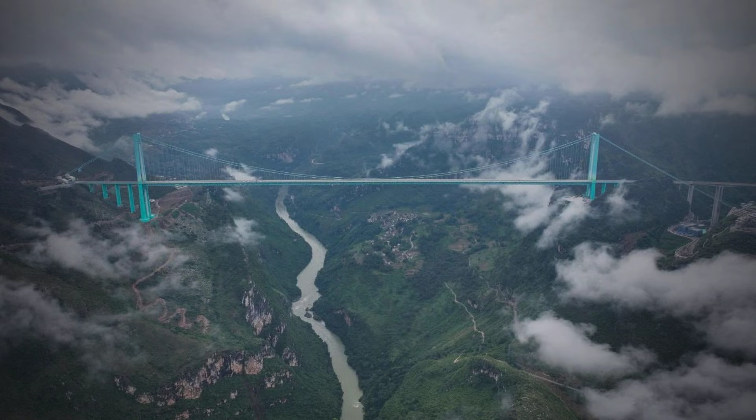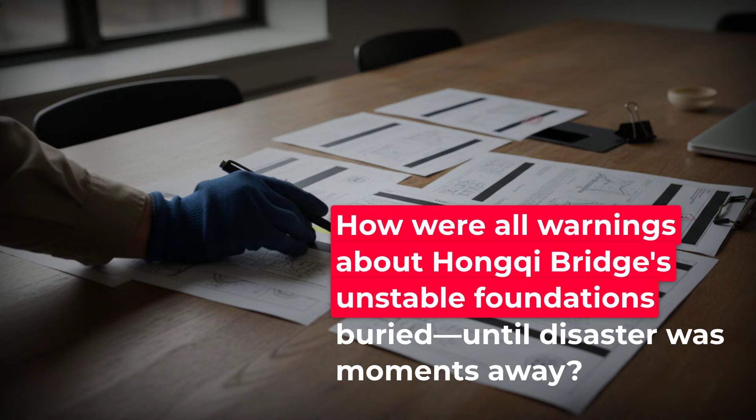On April 13, 2025, a towering $500 million bridge opened, linking Sichuan to the Tibetan Plateau. Less than 7 months later, it was closed, as engineers raced to evacuate after discovering a 10-centimeter crack, just hours before 10,000 cubic meters of earth hurled a 758-meter span into the ravine below. No lives were lost, but the unanswered question remains: how did every warning about Hongqi Bridge's unstable foundations get buried until it was too late?

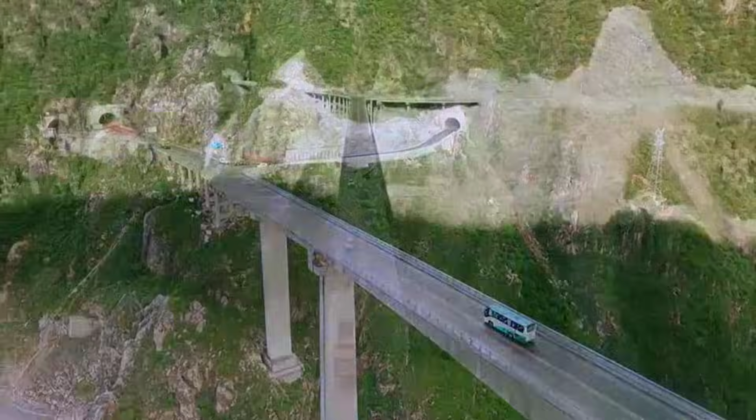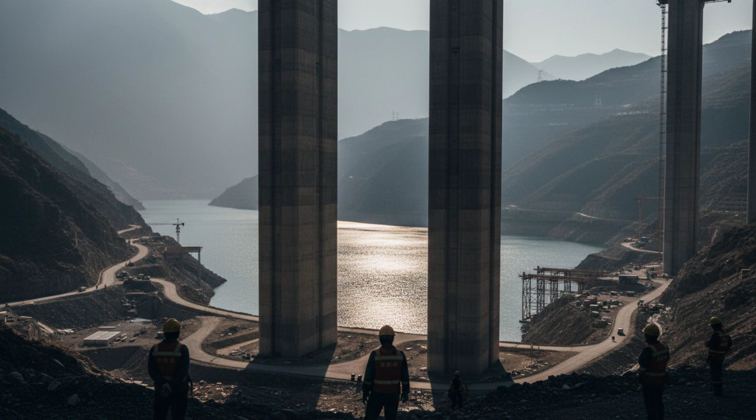April 13, 2025. After 5 years of relentless construction, the Hongqi Bridge opened to traffic, a 758-meter link stretching across the Zumuzu River Canyon. Its soaring concrete piers, each as tall as a 56-story tower, stood as proof of engineering ambition on the edge of the Tibetan Plateau.

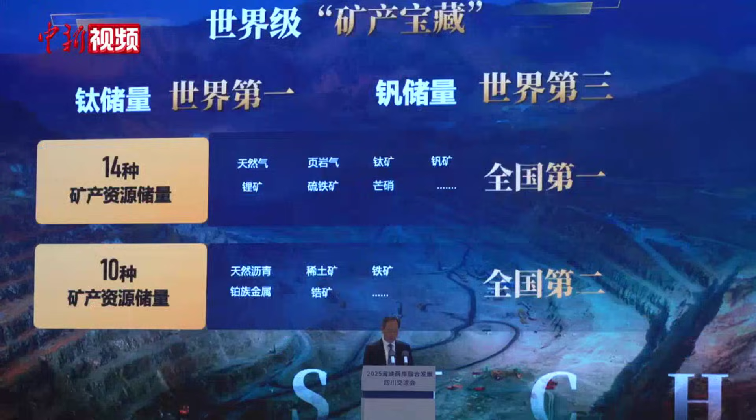The project's price tag of $500 million made headlines, but the real stakes were political, as provincial leaders promised a direct route from Sichuan's industrial heartland to some of China's most remote regions. Ribbon-cutting ceremonies drew crowds and cameras, the bridge hailed as a flagship for the Belt and Road Initiative.

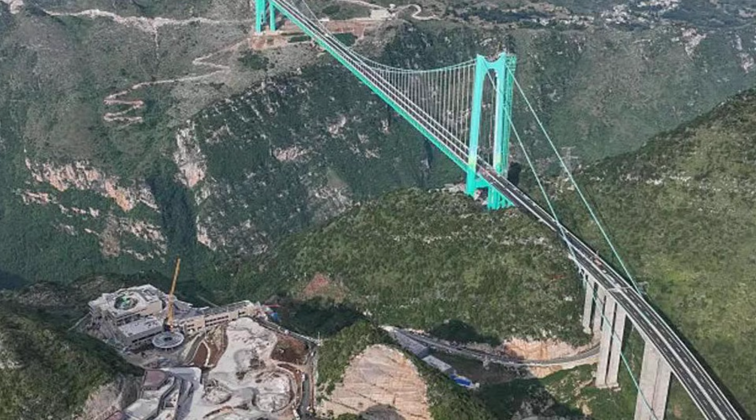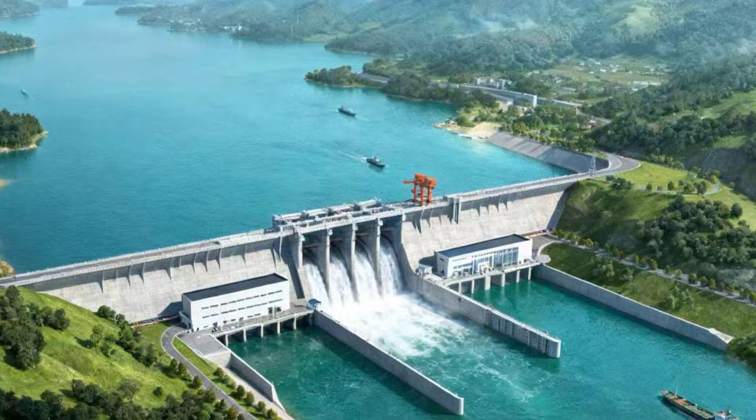Barely 6 weeks later, the landscape changed again. On May 1, 2025, the Shuangjiangkou Dam, just upstream, began filling its massive reservoir. This was no ordinary dam. At 312 meters, it was the tallest rockfill dam in the world, designed to generate 2,000 megawatts of power.

The new lake crept higher each day, pressing millions of tons of water into the fractured limestone slopes that had always made this region unpredictable. The bridge and dam now stood side by side, 2 mega projects sharing the same unstable ground.

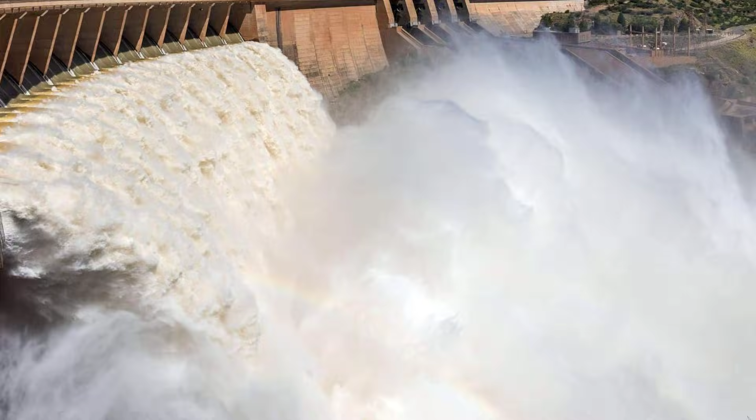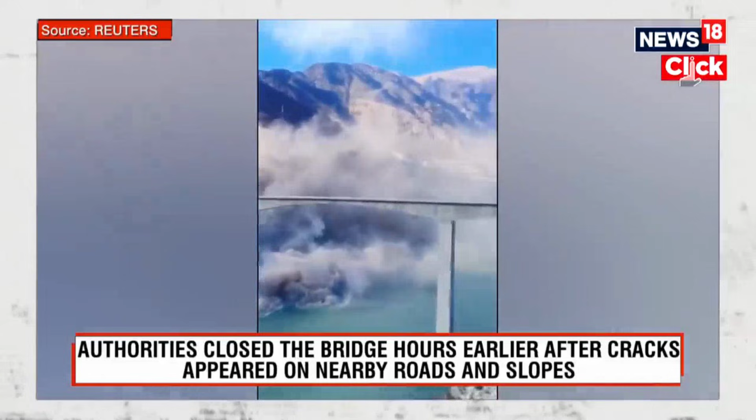As summer faded, the clock kept ticking. By early November, the dam's reservoir neared its highest planned level. On November 9, 2025, a grand ceremony marked the dam's official inauguration, with government officials, engineers, and media gathered to celebrate the achievement. The bridge, just 2 days shy of disaster, still carried the weight of daily traffic and the hopes of a region. No one paused to consider how quickly the milestones had stacked up.

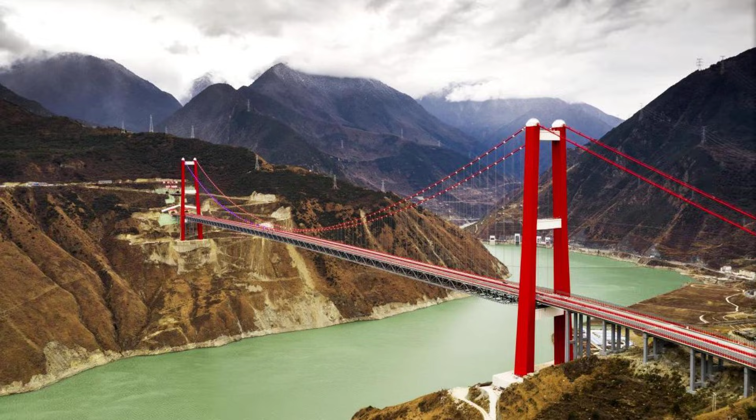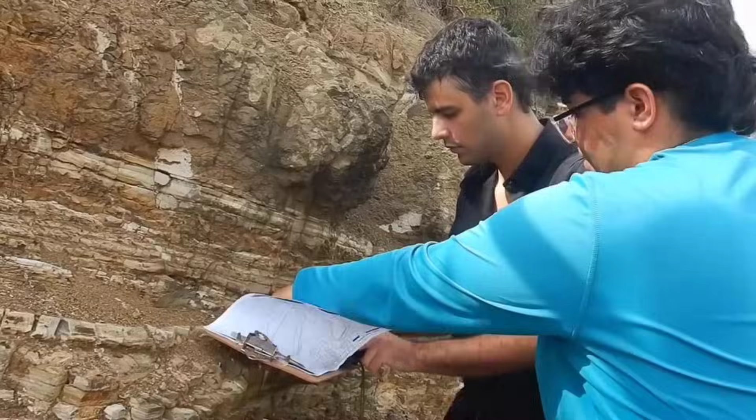5 years to build, 6 weeks from bridge opening to dam fill, and only 7 months of operation before the next crisis. The timeline was relentless, each event compressing the margin for error. In the shadow of the world's tallest dam, the Hongqi Bridge's fate was now tied to forces that did not care about schedules or celebrations. Every milestone checked off the list brought the next risk closer, even as the official ceremonies proclaimed success.

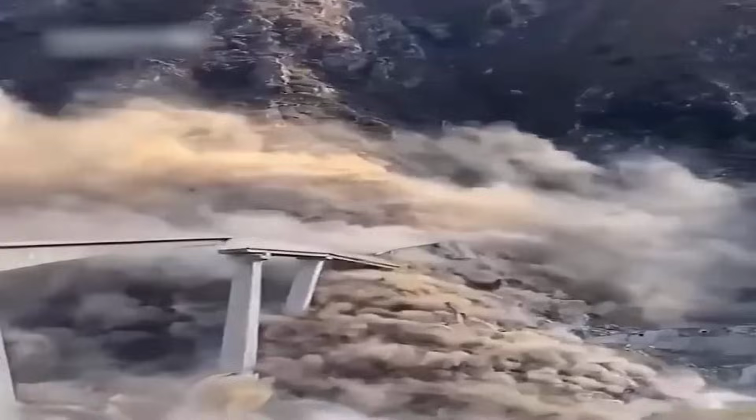On November 10, 2025, at precisely 3 p.m., a routine inspection on the Hongqi Bridge turned urgent. An official traced a jagged crack running 10 centimeters wide across the concrete deck, wider than a man's thumb. The ground nearby showed fresh fissures, and the mountainside itself looked unsettled.

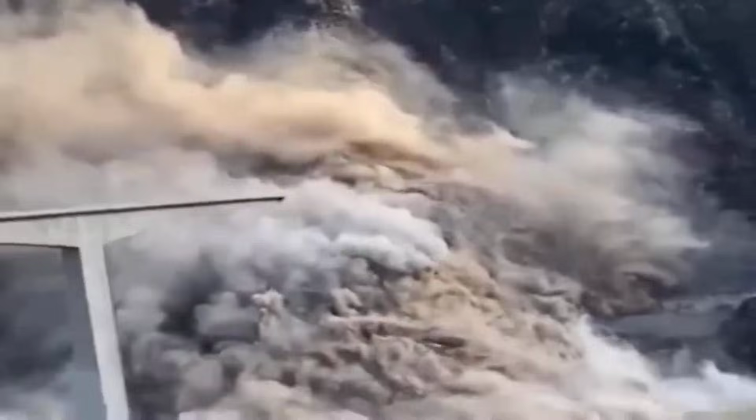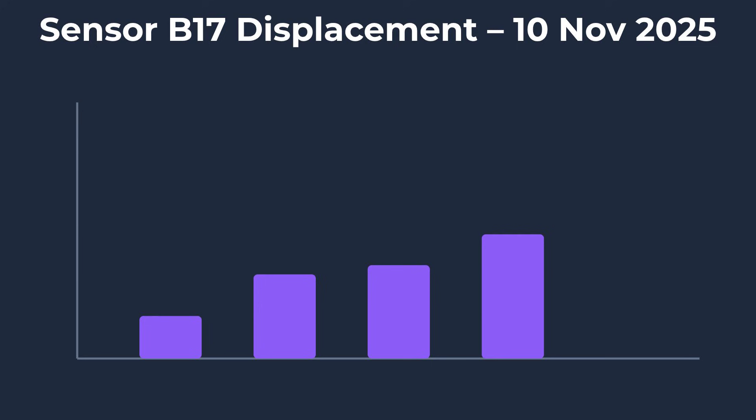Traffic rumbled over the bridge as usual, but the supervisor on duty refused to ignore what the sensors were showing. Displacement readings had started climbing. Too fast, too soon. He radioed for an immediate halt to all vehicles and ordered the bridge closed, even as some questioned whether the crack was just a surface defect.

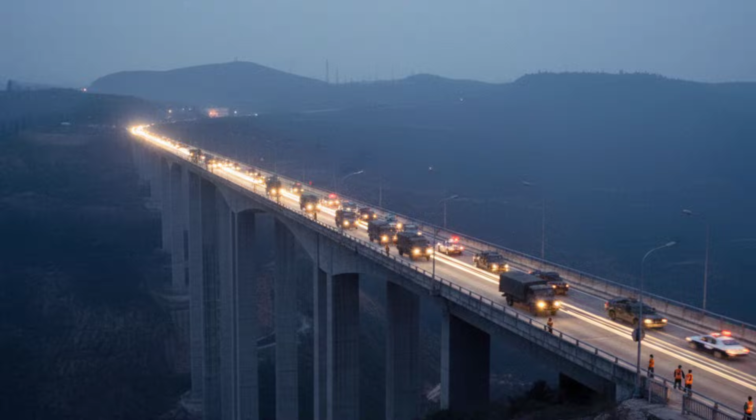Evacuation protocols snapped into place. By late afternoon, warning lights flashed at either end of the span. Drivers were turned away, and stranded vehicles were guided off the bridge in small convoys. The decision to clear the structure was not made lightly.

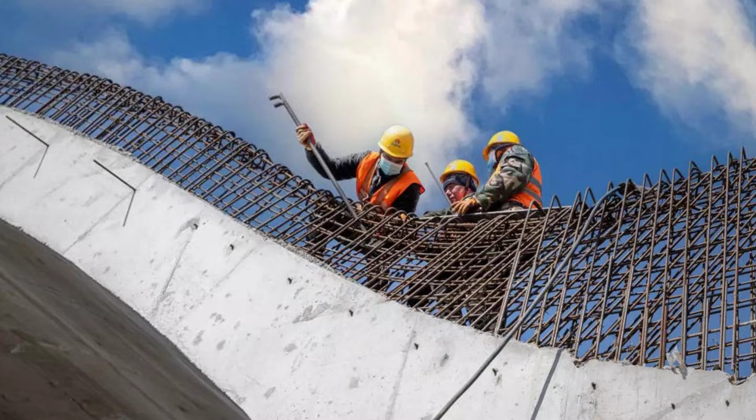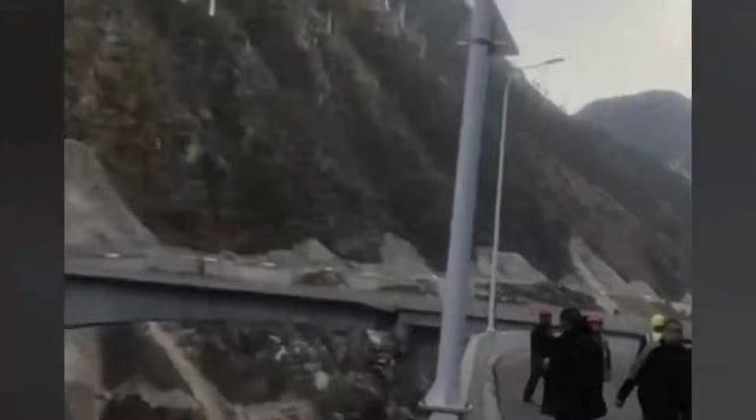Every hour the road stayed closed meant mounting pressure from above. But the supervisor stood firm. He walked the length of the deck with his crew, checking every expansion joint, feeling the vibration underfoot. Workers reported the bridge trembling beneath them, a low, unnatural sway that grew stronger as dusk fell.

By 11 p.m., the last car had left. The bridge, now empty, stretched silent over the canyon. On-site workers gathered their equipment, some glancing nervously at the crack, others filming short clips on their phones. One foreman, voice shaking, recorded a message for his family, just in case.

The supervisor checked the sensor logs one final time before locking the site gates. He knew what the numbers meant. The ground was shifting, and the bridge was no longer safe.

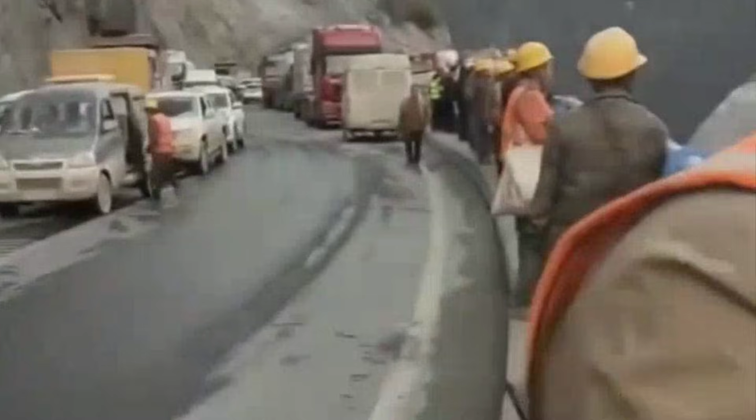No one slept well that night. Some workers stayed in nearby dormitories, replaying the day's warnings in their minds. Others left the valley altogether, unwilling to risk what might come next.

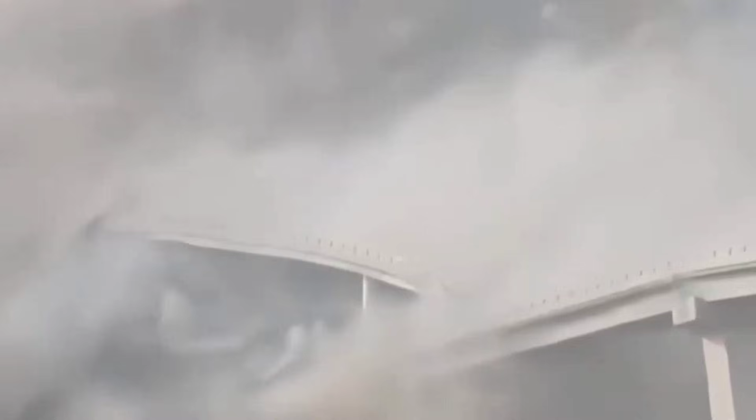The bridge remained deserted through the early hours of November 11, 2025. When morning came, only the wind moved across the empty span. The evacuation, prompted by a single undeniable crack, would be the reason not a single life was lost when disaster struck. Beneath the Hongqi Bridge, the ground was anything but solid.

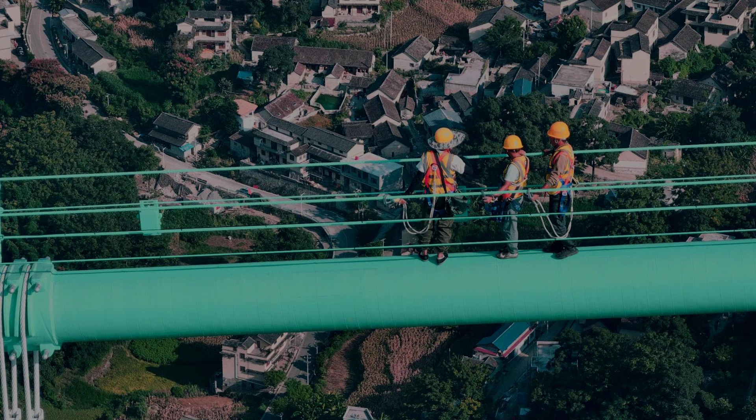Construction records show each foundation pile driven just 20 meters into what was believed to be stable limestone bedrock. On paper, that depth met the minimum code. In reality, it barely scratched the surface of a landscape riddled with hidden threats.

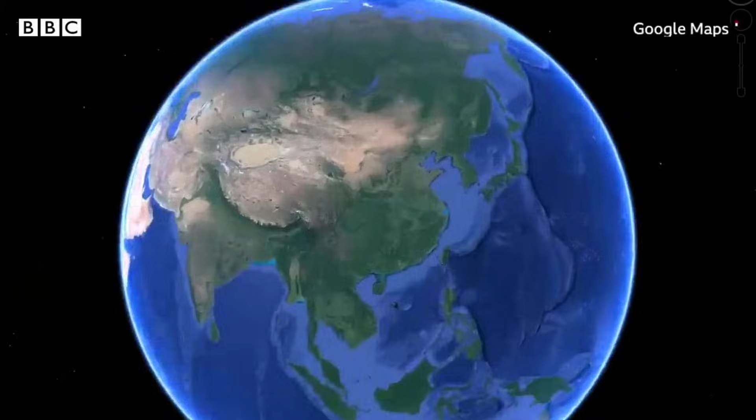Karst limestone, shaped over millennia by water dissolving the rock, forms a tangled web of voids, some as small as a fist, others large enough to swallow a truck. Engineers relied on borehole cross-sections to map these cavities, but the surveys missed nearly 40% of the subsurface voids. What looked like continuous rock on diagrams was, in fact, a fractured maze.

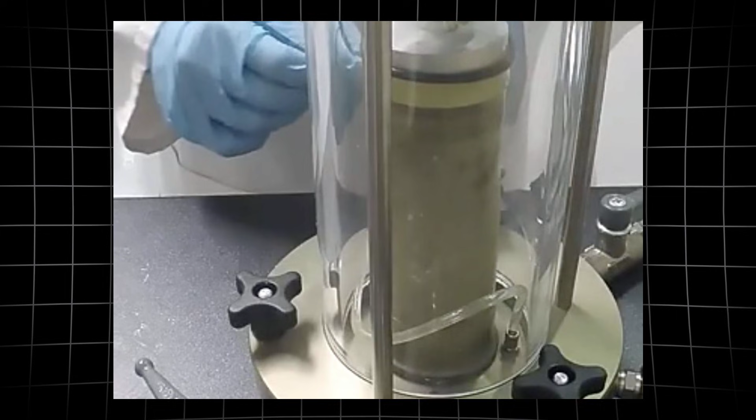From the start, the bridge's support was fragile. Piles meant to anchor the structure rested on pockets of air and loose fill rather than solid stone. Every calculation, load, stress, shear, depended on the assumption that the ground would hold. But the margin for error was razor thin.

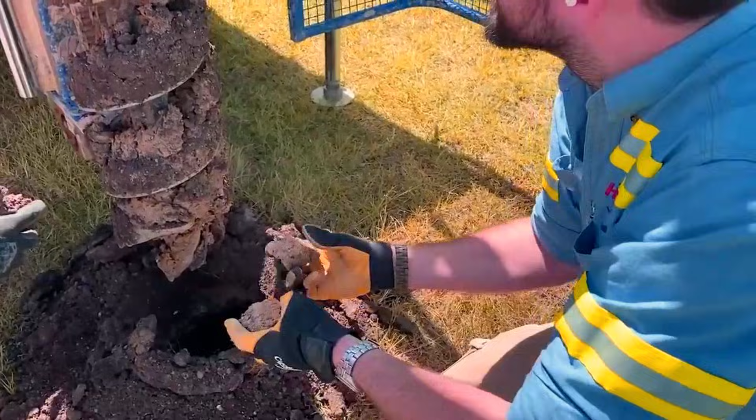In karst terrain, even a small misreading can mean the difference between stability and collapse. The bridge's foundation sockets, at only 20 meters deep, offered little resistance to shifting earth above and empty space below.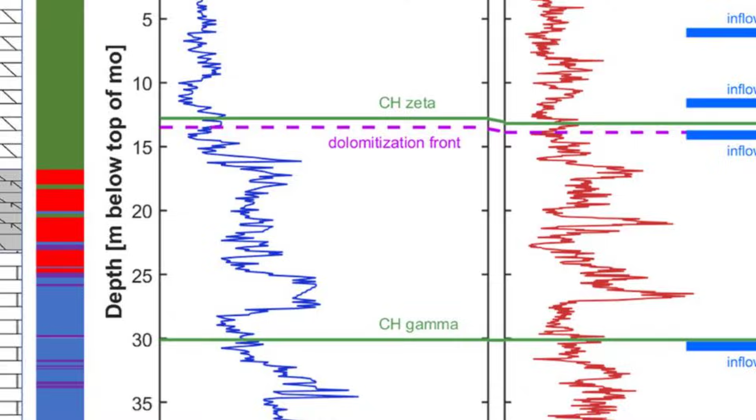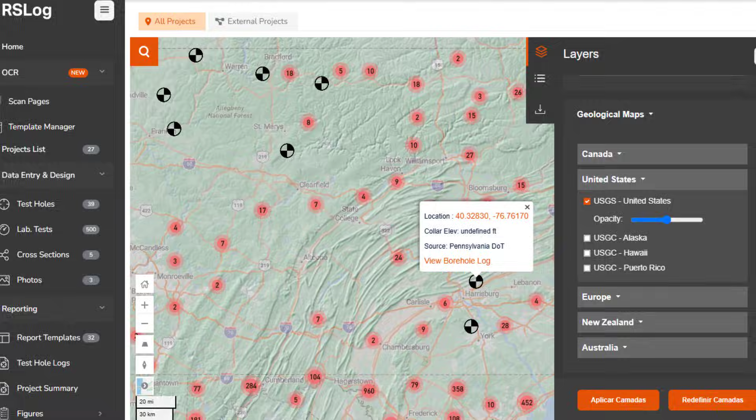Borehole logs from the pre-construction phase tell a story of missed warnings. Core samples showed occasional soft zones and water ingress, but these findings were written off as isolated. Later analysis revealed these were only hints of a much larger, interconnected void system. The true extent of the cavities remained hidden until it was too late.

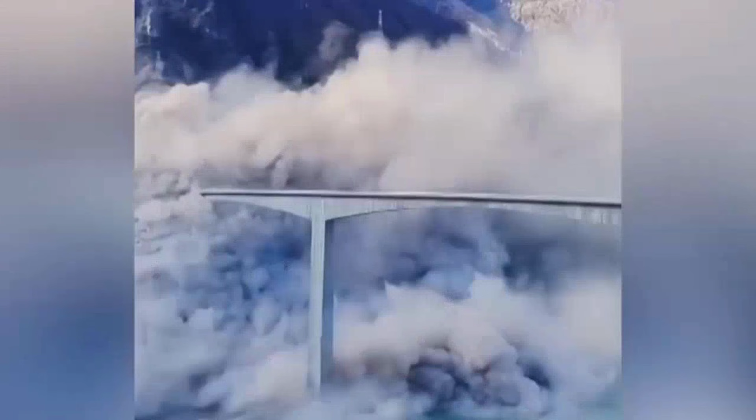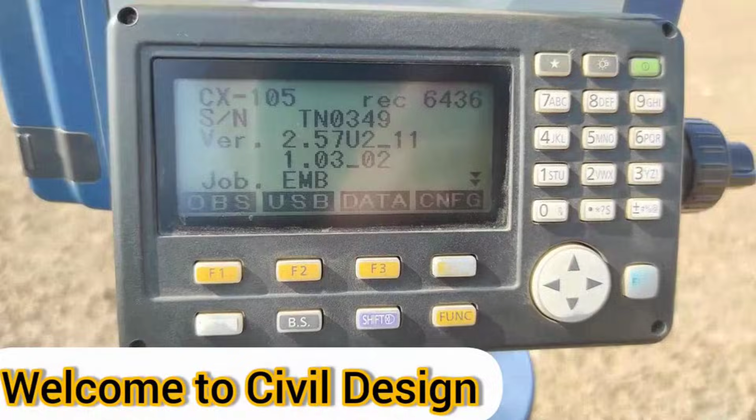When the ground began to saturate, water found its way through cracks and fissures, seeping into every hollow. The limestone's natural weaknesses multiplied as pressure built from above and within. The bridge's designers had gambled on the ground behaving as mapped.

Instead, the shallow sockets left the foundations exposed to every shift, every surge of groundwater, every tremor from the valley walls. As the days wore on and the reservoir rose nearby, the invisible network beneath the bridge became more active. Voids filled, emptied, and shifted. Each change eroded what little support the piles had.

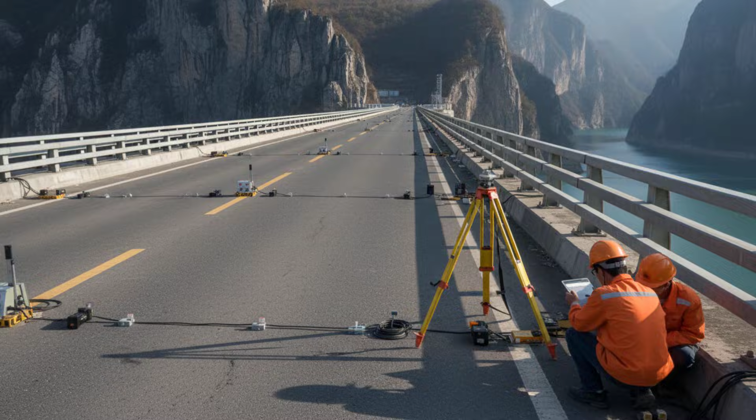By November, the margin for safety was already gone, long before the first visible crack appeared on the deck. The Hongqi Bridge stood tall, but its roots never reached the stability its designers had promised.

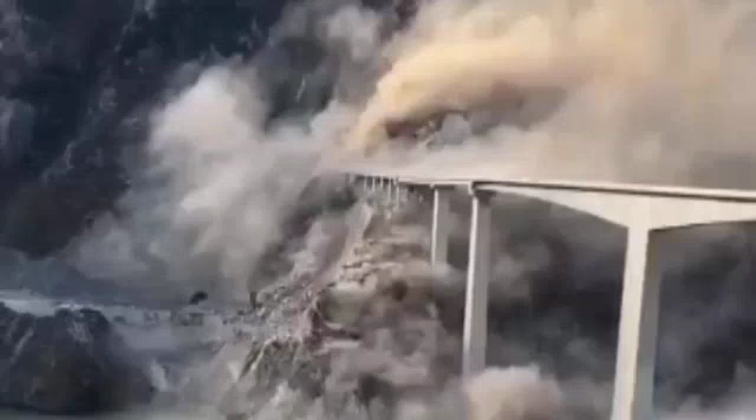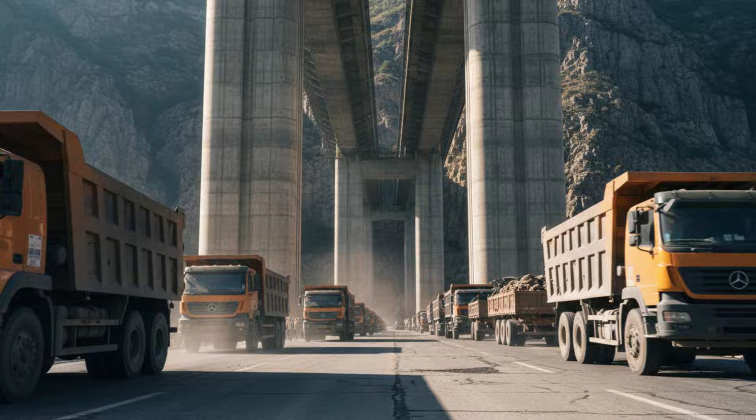Pre-stressed concrete was chosen for the Hongqi Bridge's main frame, promising strength and flexibility over the yawning gorge. The design called for cantilevered arms to reach out from piers that soared 172 meters above the valley floor, taller than most city skyscrapers. Each span depended on a precise balance: the bridge's own weight, the pounding of trucks, and the shifting forces of wind and rain all had to flow through the structure's core and down into the foundations.

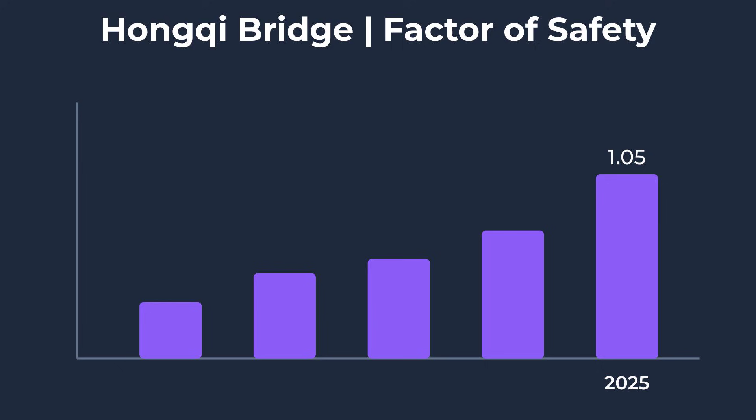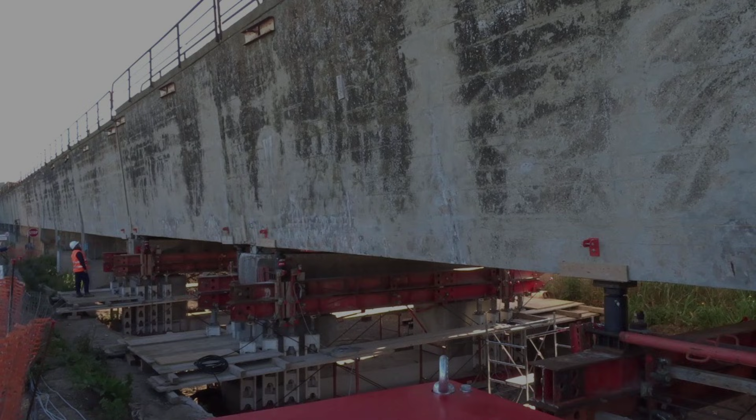When the bridge opened, engineers calculated a comfortable reserve, what they called the factor of safety, meant to absorb unexpected shocks. But as months passed, that margin quietly eroded. Finite element analysis, run after the disaster, paints a stark picture. At the moment of failure, the bridge's load path did not just approach its design threshold, it was pushed to 1.05 times the intended demand.

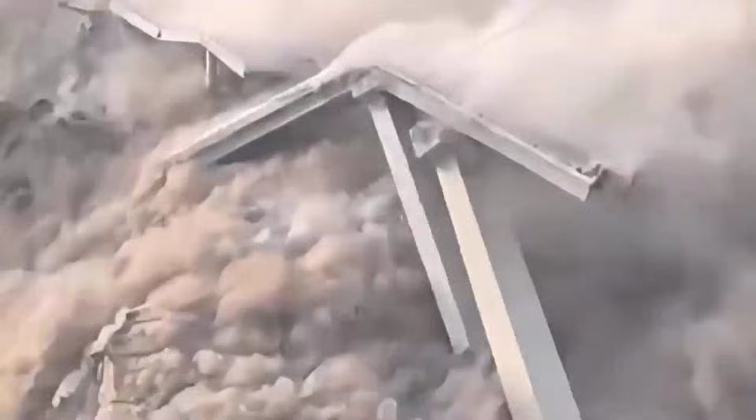Forces meant to be distributed across the entire frame instead concentrated at the weakest points, the cantilever joints and the interface between pier and deck. The pre-stressed tendons, designed to hold under immense tension, began to yield. Concrete, which can withstand crushing pressure but not pulling, started to crack at the microscopic level.

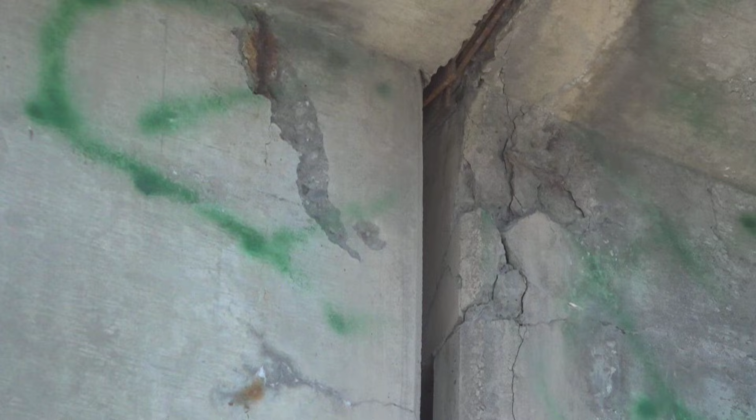Each vibration from passing trucks, each subtle shift in the ground below, amplified those tiny fractures. Over time, these microcracks multiplied, linking up to form hairline fissures that snaked through the deck and beams. The bridge's reserve capacity, the difference between what it could handle and what it actually faced, was consumed bit by bit.

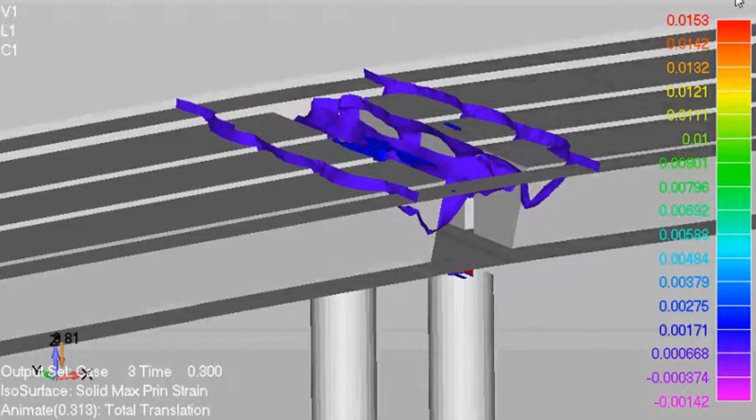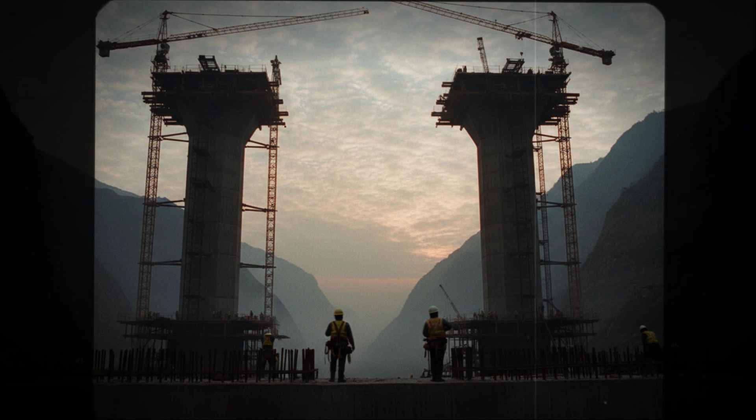As the western approach lost support from below, the remaining structure was forced to absorb loads far beyond its intended limits. Strain maps from the post-collapse analysis show stress fields radiating out from the failing foundation, with red zones clustering around the tallest piers. The columns, once symbols of engineering prowess, became the fulcrum for disaster.

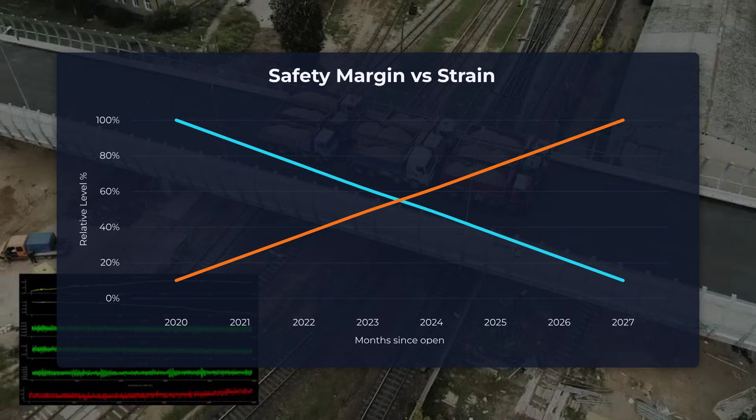At critical joints, sensors would have detected sharp spikes in strain and displacement in the hours before collapse. But by then, the material itself was already giving way. The bridge's failure was not a sudden snap, but a crescendo of stress, fatigue, and overload.

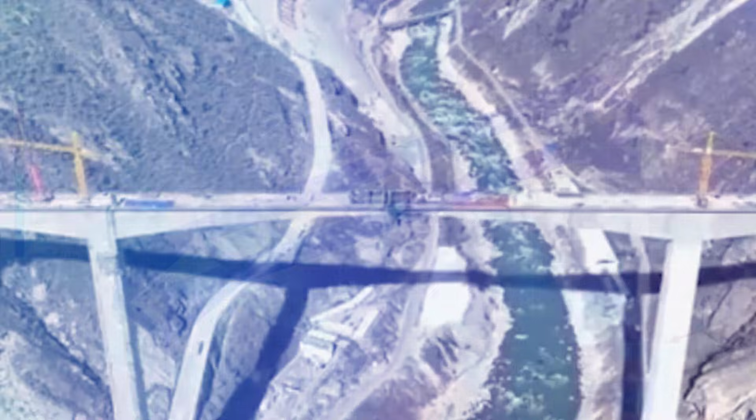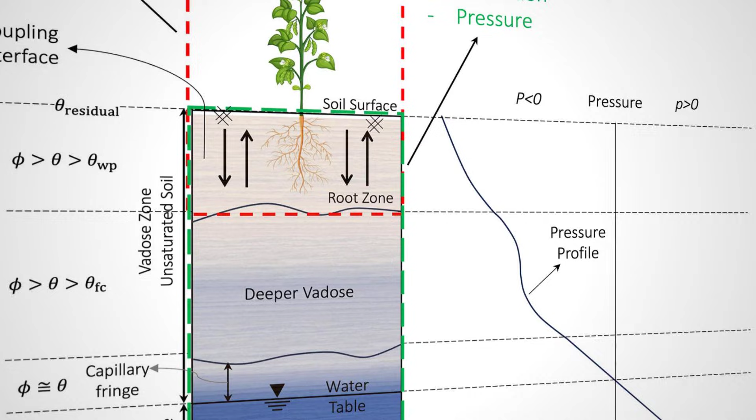Microcracks seeded during rushed construction and months of vibration became the hidden fault lines. When the final surge of force arrived, nearly double what the design allowed, there was nothing left to absorb it. The structural frame, once celebrated for its elegance and strength, reached the end of its capacity.

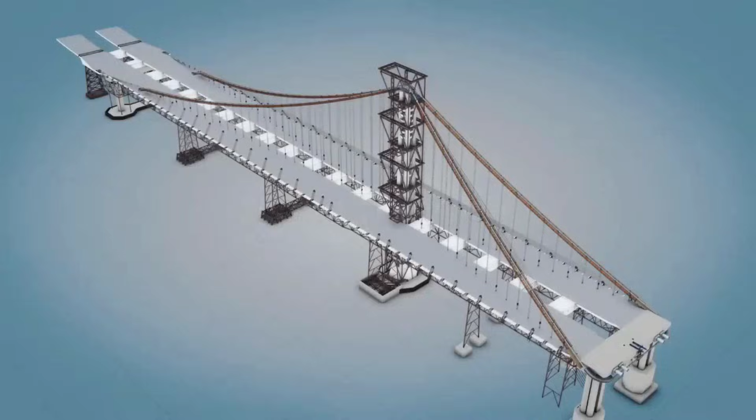The collapse that followed was the inevitable result of a load path forced past every limit, with no margin left to give. At 4:10 p.m. on November 11th, 2025, the surveillance cameras fixed on the western approach of the Hongqi Bridge captured the moment every engineer dreads. The sequence began with a deep, silent shudder. Barely visible, but enough to send a ripple through the span.

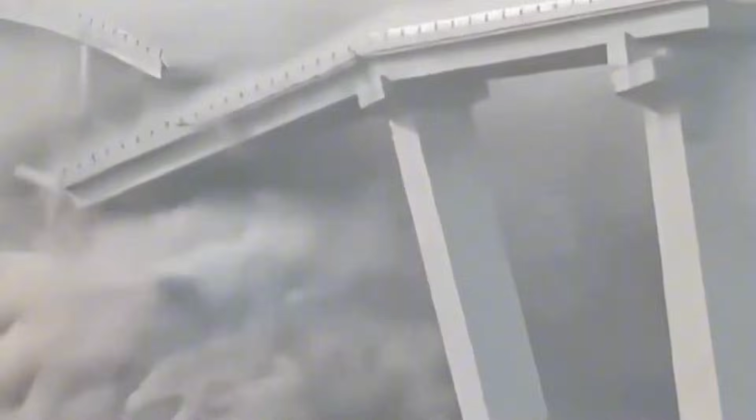In the space of seconds, the slope beneath the approach gave way. 10,000 cubic meters of saturated earth, loosened by weeks of rising groundwater and hidden voids, surged downslope in a single massive wave. The ground that had held the bridge for 7 months simply vanished. Support columns, once anchored in limestone, lost their footing almost instantly. 80% of the foundation's bearing capacity disappeared in a heartbeat.

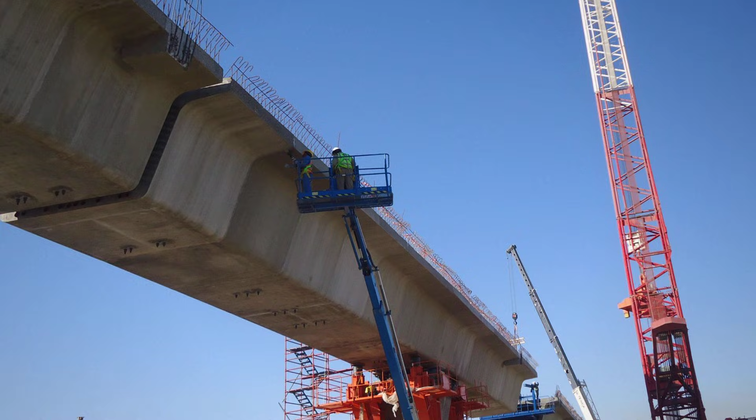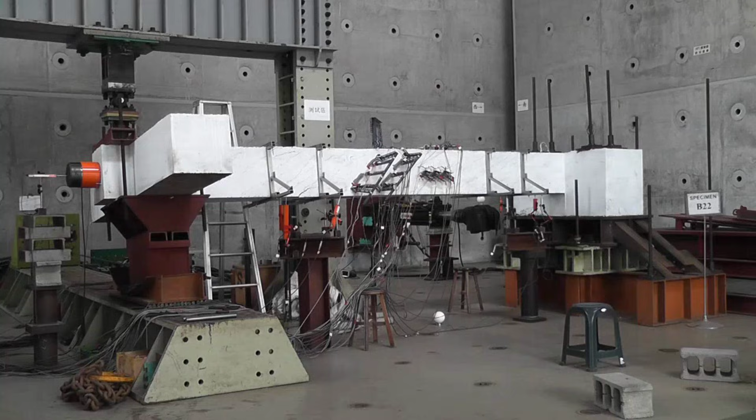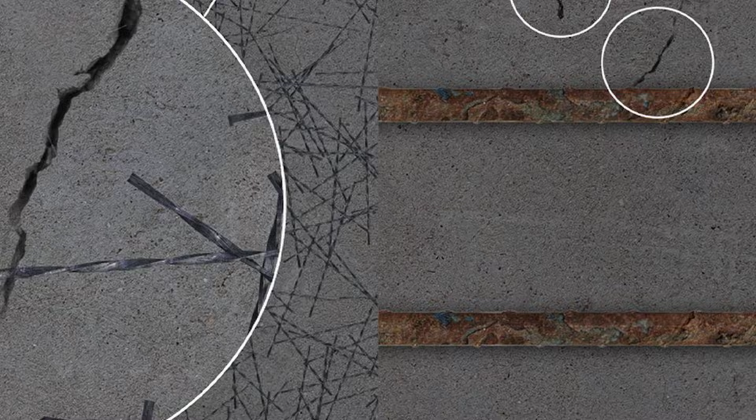The cantilevered arms, built to balance the weight of concrete and traffic, found themselves suspended over empty space. Electrical lines stretched to their limit, sparked and snapped as the deck twisted. Surveillance footage froze the moment sparks erupted at the bridge top, white flashes against gray sky, while the main span fractured at its joints. Pre-stressed tendons, pulled far beyond their design, recoiled and tore through the concrete shell.

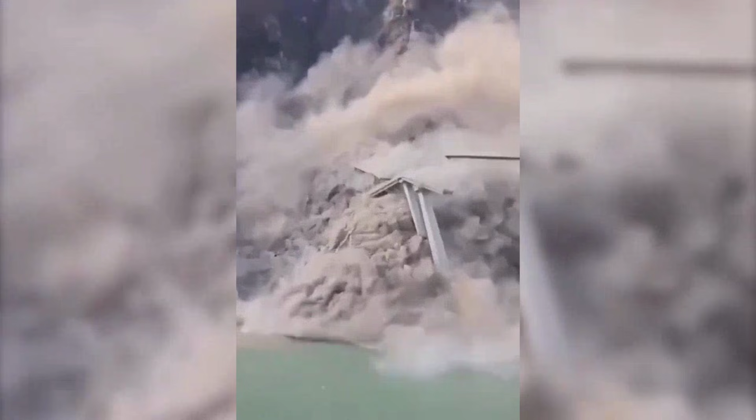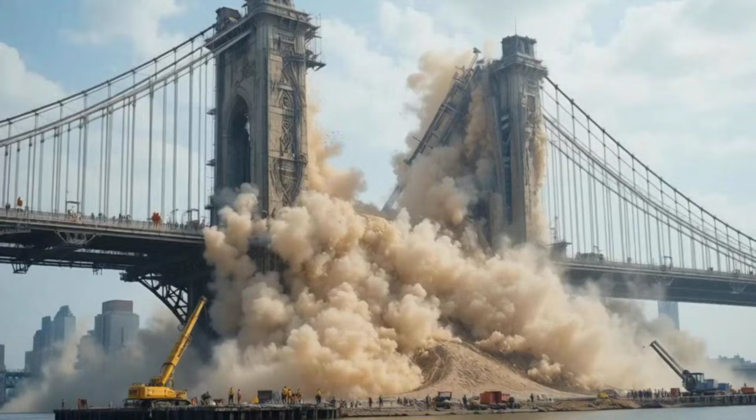The collapse was not a single fall, but a chain reaction. As the western approach dropped, the deck split along the expansion joints. Segments tilted, then tumbled into the ravine below. A plume of dust erupted, billowing upward and outward, marking the site for miles across the valley. The force of the impact sent shock waves through the canyon, stirring up debris and silencing the usual echo of traffic.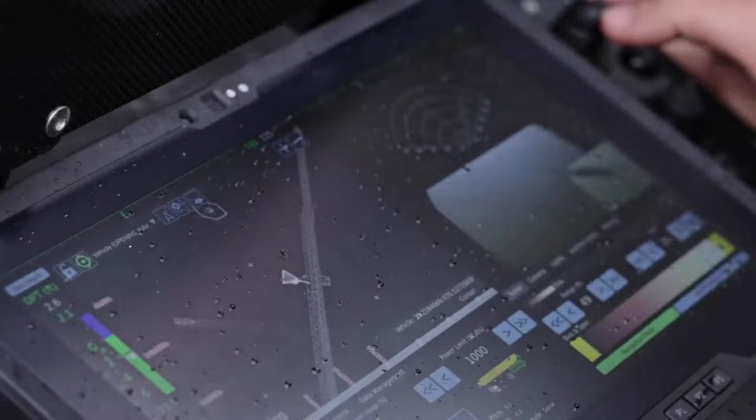Forensic review of the video reveals the sequence. First the landslide, then the loss of support, then the structural failure cascading from west to east. Every element, earth, concrete, steel, reached its limit in less than a minute. The bridge's final moments, preserved frame by frame, left no doubt about the mechanics of failure. Where there had been a continuous span, only fragments remained, scattered across the canyon floor. The dust lingered long after the movement stopped.

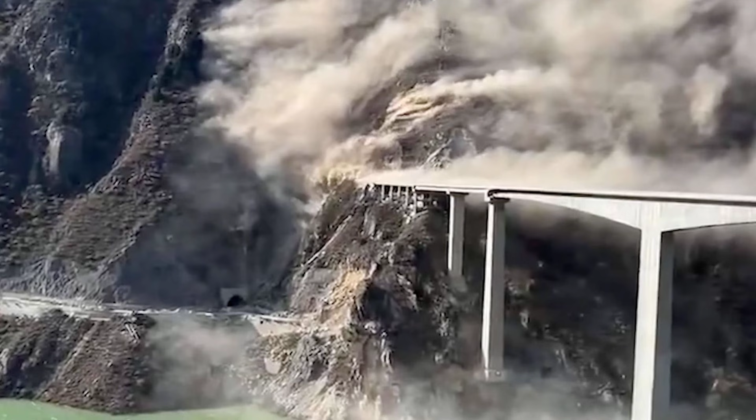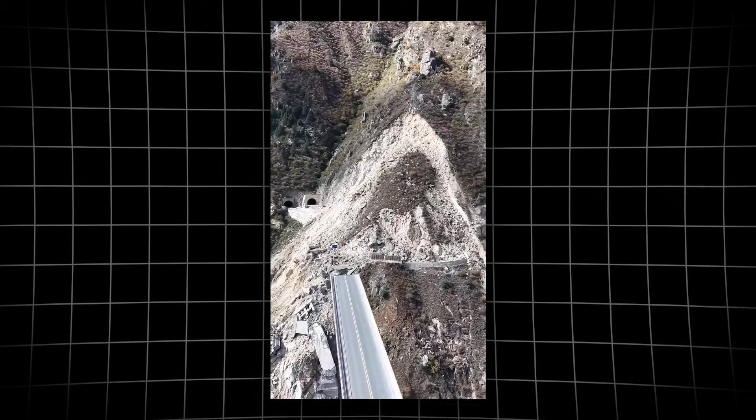In the aftermath, investigators would replay these 60 seconds again and again, searching for answers in the details. The initial surge of earth, the precise instant of support loss, the telltale sparks, the shape of the falling deck. The evidence was clear even before the dust settled. What held the bridge up had disappeared from beneath it, and nothing in the design could save it once the ground gave way.

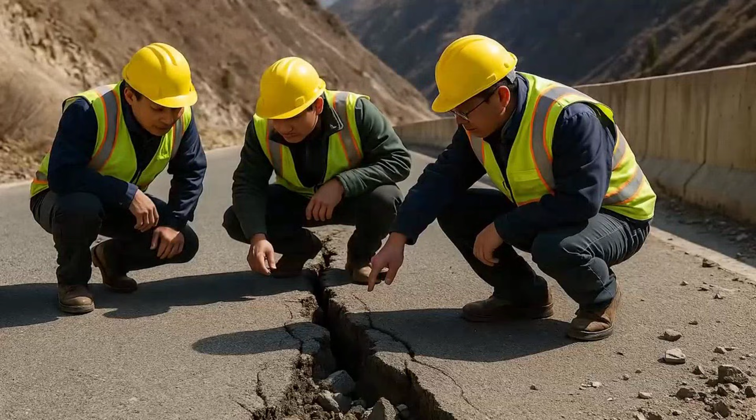The paper trail behind the Hongqi Bridge collapse runs deep, and it does not flatter those in charge. In 2023, an independent geohazard audit flagged the very dangers that would later destroy the bridge. The original draft circulated among technical staff warned of shallow foundations in karst terrain, insufficient drainage for heavy rainfall, and the unpredictable nature of the limestone beneath.

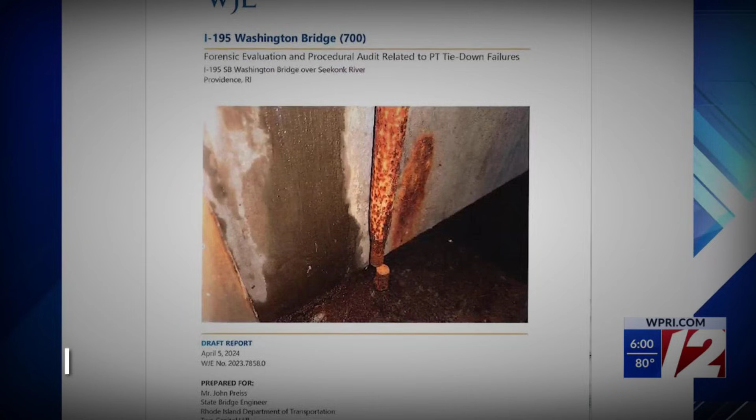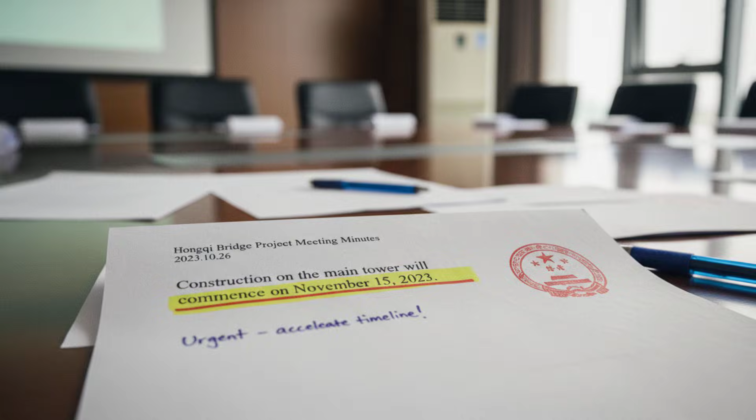When the audit reached the approval committee, the language had been softened. Warnings about urgent risk of sudden foundation failure were replaced with instructions to monitor for settlement. Recommendations for deeper piles and expanded grouting were trimmed to consider further geotechnical review if schedule permitted. Meeting minutes from the final design phase reveal the crossroads. One line stands out. Deeper borings were discussed, but set aside to keep pace with construction targets.

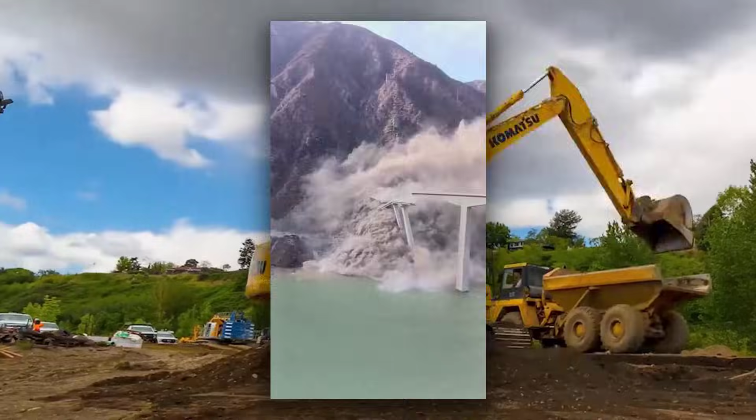The record shows engineers understood the risks, but the pressure to deliver on time outweighed caution. Schedules, not soil, set the limits. The focus shifted from what lay hidden beneath the bridge to the visible progress above it. After the collapse, the auditor who first raised the alarm reviewed the evidence. The structure performed as designed, but the foundation was never truly there.

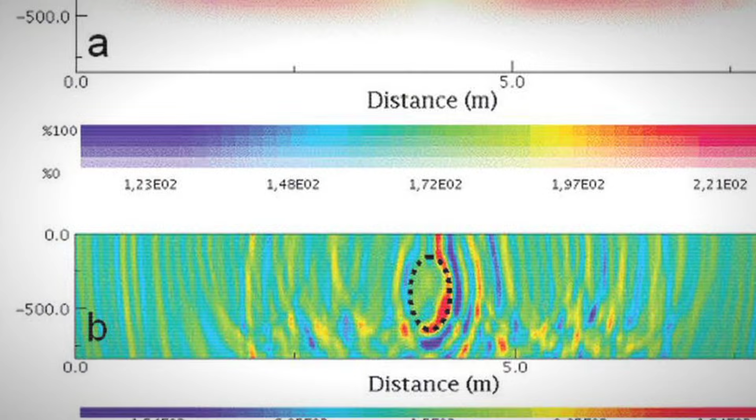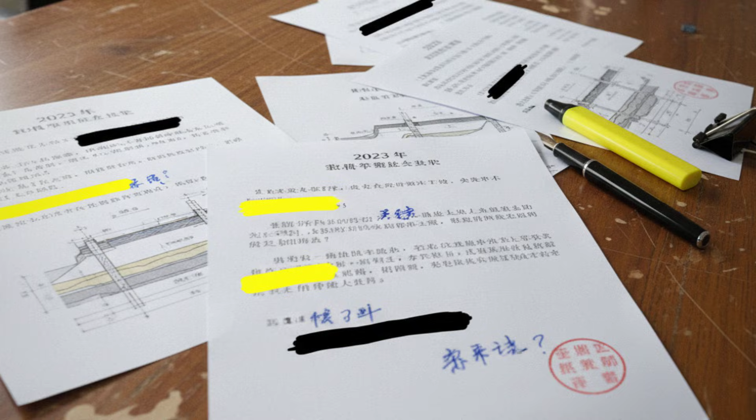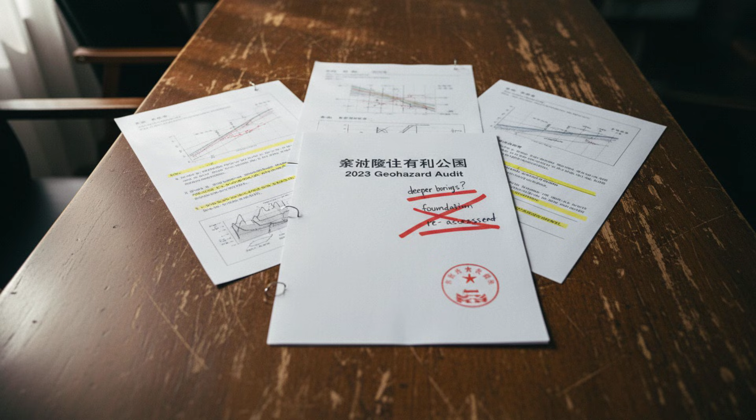Forensic mapping confirmed the worst fears. Voids and cavities ran through the limestone, undetected and unaddressed. Every softened phrase in official summaries, every waived inspection, stripped away a layer of defense. The collapse was not a surprise to those who had read the early drafts. The warnings were there, spelled out in black and white, buried under layers of softened language and political urgency. The evidence leaves little doubt. The disaster was foreseen, and the decision to ignore it was documented long before the ground gave way.

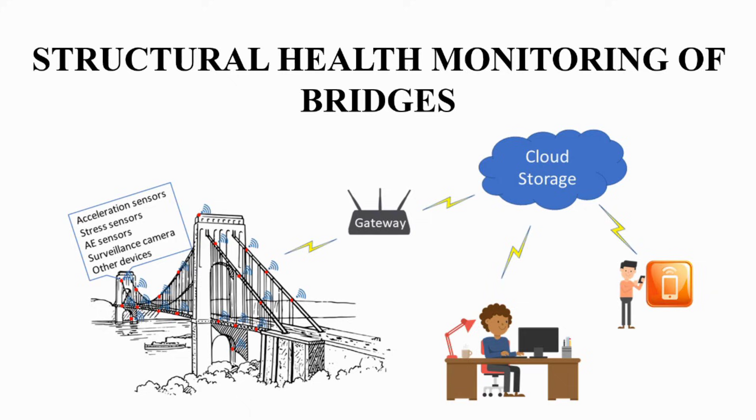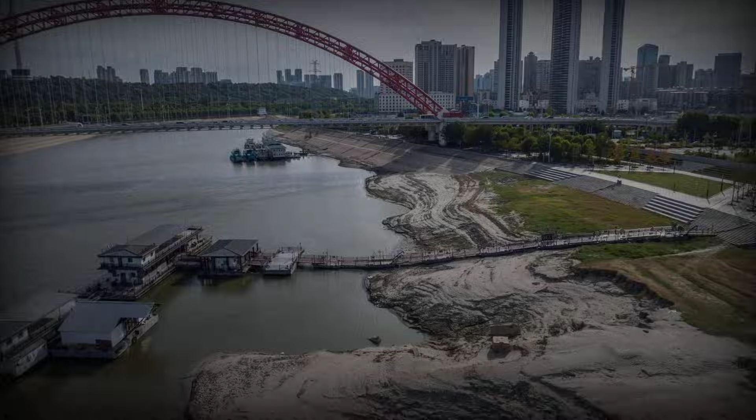Today, over half of new megabridges worldwide face the same collision of rushed deadlines and ignored warnings that doomed Hongqi. Political targets still override geological facts, and sensors flash red in silence. The next collapse is already seeded wherever scrutiny gives way to speed. Every decision not challenged is a risk multiplied. Which bridge and whose lives will pay the price next?